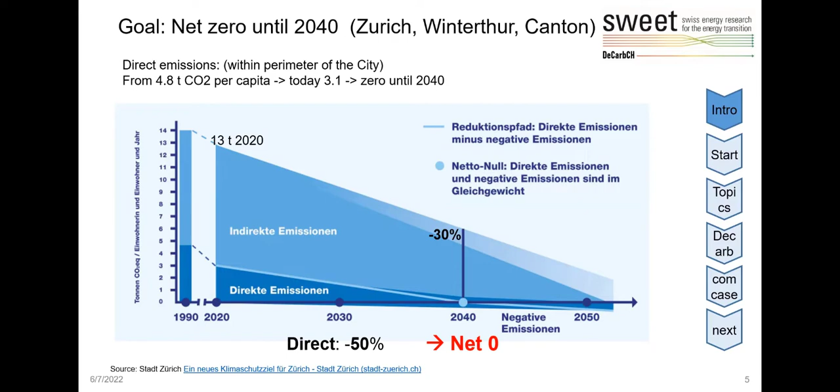Zurich has done a lot already. You see here a graph from 2015. Energy planning of Zurich is a discipline that has long ago started to work on. Zurich has a clear idea of the heating demand for 2050, what demand where, because that's very interesting and important to know where we have to concentrate future supply of the energy. You see here some very dense centers and some regions with low density. We have to find specific solutions for those. And so that's the demand of the heat.

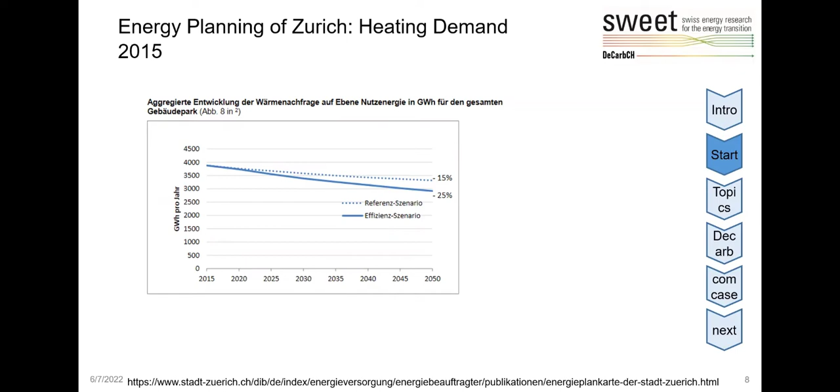There hasn't been a lot yet, but the prognosis here, talking about efficiency gains we have to reduce - that's the scenario, the reference scenario shown as a dotted line, and the full line is the efficiency scenario. So the idea is to reduce demand by 15 to 25% until 2050. Of course that's helping, an important thing to have a chance to come to zero emissions.

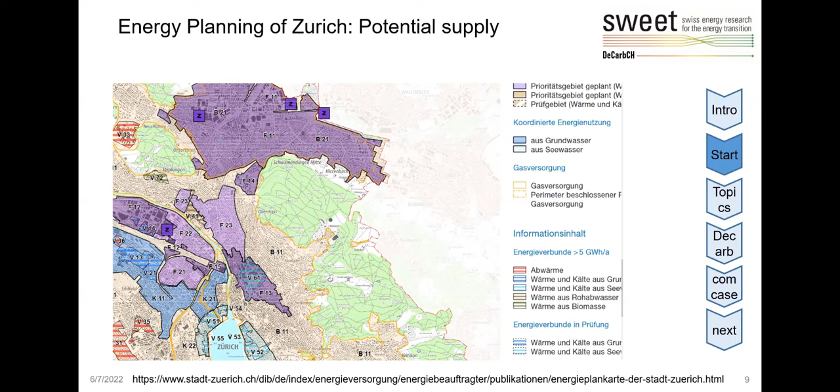The energy planning, what makes it very interesting, is the potential supply of sources for heat. You see here, it's already in a planning stage. We see what areas could be heated by what source, or supplied by what source. So we have water as a heating source, or biomass shown in green lines, or groundwater heating sources, or of course the long distance heating from waste incineration. That's all we have as a starting point in Zurich. The supply zones have already been identified.

What do we have to do? That's from the referendum, what the city already has in mind to take measures to implement to reach the goal of zero emissions.

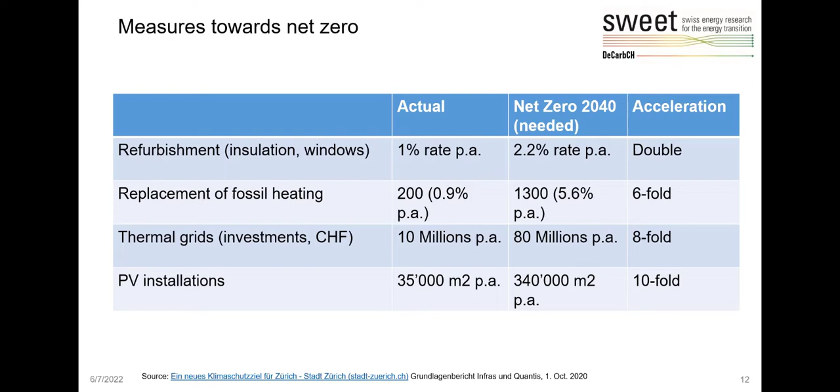So that's the numbers, the challenges that Zurich faces.

The main topics, again from Zurich: the goal until 2040 is that 60% of the heating demand should be covered by thermal grids, an important source of heating, with usage of local sources wherever we can, exploiting energy from wastewater, incineration plants, groundwater, and geothermal heat.

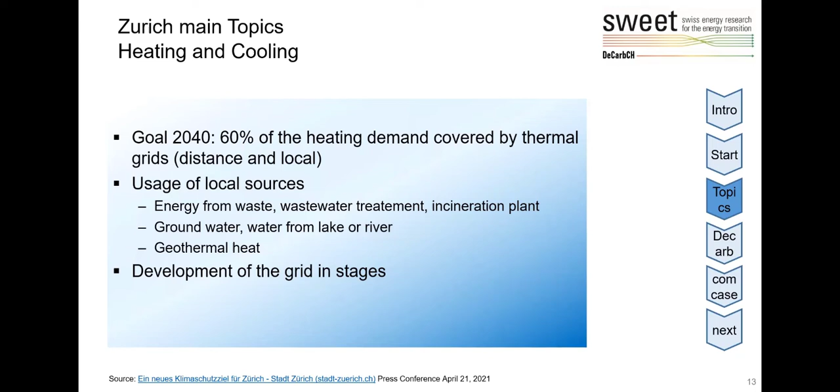Therefore we need development of the grid in stages, as it is planned and confirmed publicly already. In terms of production, we have the renewables, so photovoltaics has to be intensified, and biomass, which of course is a limited source. We're talking about import of wood, for example, or waste biomass.

Energy consulting in terms of energy efficiency, incentives, subsidies, and forced transformation of public buildings. The city wants to be ahead, a role model, and reach net zero by 2035.

So to sum it up, Zurich seems to me like a perfect sandbox for us, the researchers, to implement and see wherever we can, what we can do.

The legend, sorry, it's in German, but it's the long distance heating. It's Erdsonden, meaning geothermal energy, biomass, whatever you can imagine. You find some places probably where we can apply findings whenever they match.

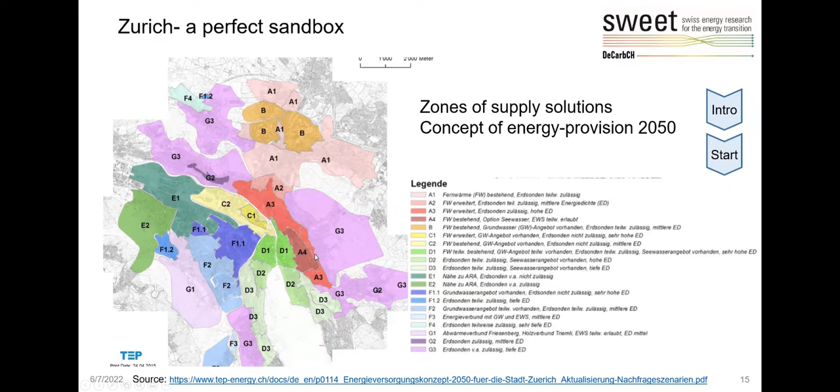So that's the sandbox where we start. And what do we do from this, the perspective of Sweet Decarb?

So that's where we start. That's where we aim to help and work together with the city of Zurich, and what it really matches perfectly is our aim to facilitate, speed up, and de-risk the implementation of renewables, as was said in the beginning of our Sweet Decarb project.

So the task is identification of the challenges - that's what we are actually doing. We want to have the results, and we want to learn from the results for scaling up or for feedback for our researchers.

The thermal grid technologies is a really important issue as well. If we can improve certain things here, that's tasks and outcomes - definition of the top topics.

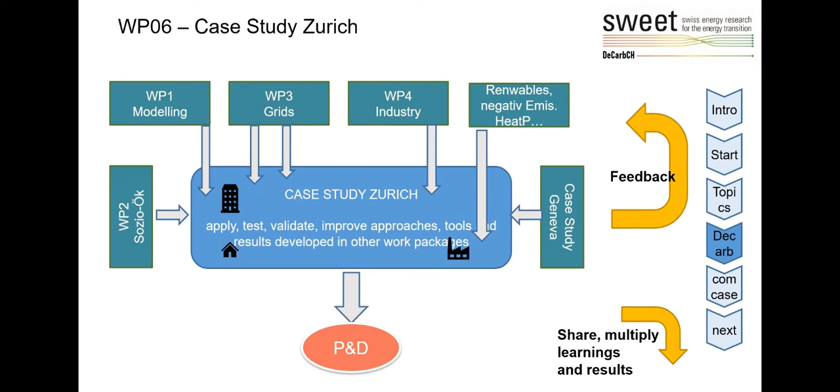What is the framework? What are incentives? What can we do together? Then it's important giving feedback to the researchers when we have an opportunity to apply things, and finally to share and multiply the learnings and the results. That's what we aim for.

Here's some examples of what we could imply or test in the Zurich case study. Work package 2 and 3: the legal framework, socio-economic frameworks, design optimization of the thermal networks. It is decided we have millions to spend, so it's very important to have ideas to improve technology and improve the implementation of this. Work package 3, networks, will of course help us with that.

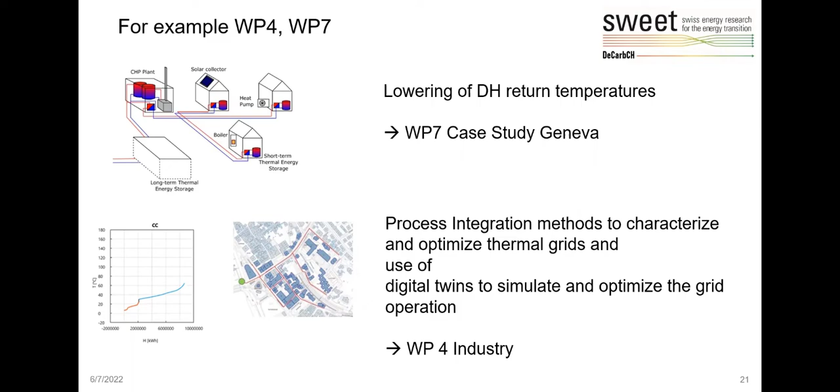Also the other work packages - work package 4 from the industry side, lowering return temperatures, or the work package from Geneva on how to lower return temperatures from the district heating, or process integration. We already have some examples from Zurich from the industry work package that might also have impact or further implementation in Zurich. So the main topics: thermal energy system modeling, technologies, design, legal socioeconomic integration, energy demand profiles.

Renewables, heat transformation, storage - important topics, and negative CO2 emissions.

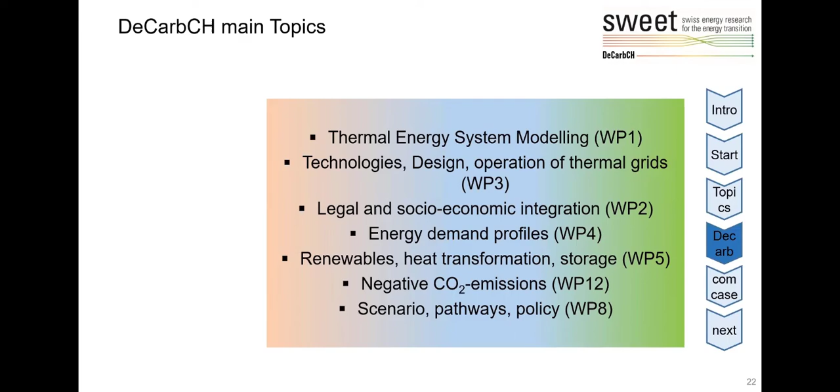We have seen Zurich will need finally certain negative emissions, so that could be important as well. Scenarios, pathways, policy - we've seen it's very important to have ideas on the development of the demand to match it with ideas of the supply.

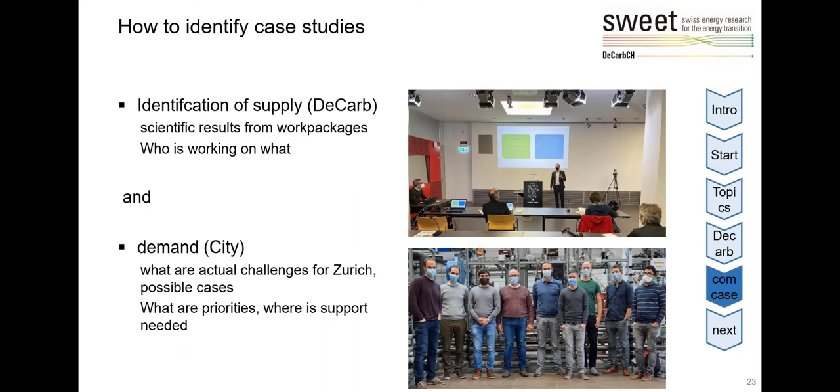So we're now in the stages on the right-hand side. That's just some symbolic pictures. We have our workshops working together, and of course, on the lower right, our researchers with their hands on technologies. So we have to match these two pictures together to identify supply, demand, Zurich, and common needs, common possibilities to work together.

That's the match between Zurich and the research side. That's what we have identified so far. What is of common interest for Zurich and for our researchers?

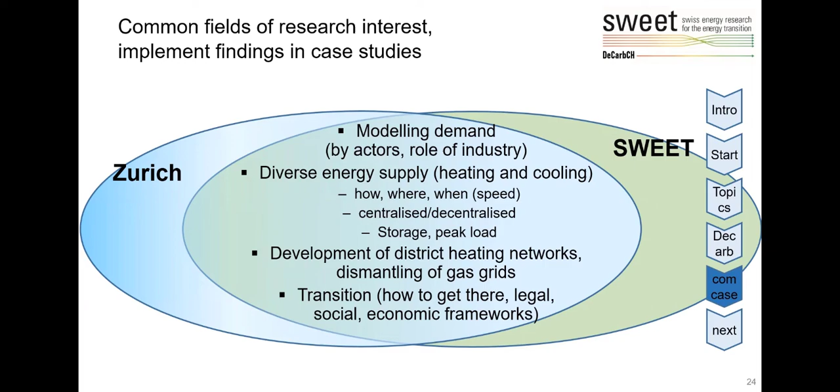That's the modeling of demand, the diverse energy supply of heating and cooling - how, where, when, etc. - centralized storage, peak loads, these questions, development of the district heating networks. We've seen there's a lot of things to discuss, and according to this, also questions of dismantling of the gas grids. The transition - how to get there, what do we need, legal, social frameworks. These are some important questions, of course.

So far we have identified, together with the government of the city administration, the fields of high priority, like modeling of the demand, the energy supply, the potential, the development of the thermal grids, district heating networks. That's of high priority in terms of time and topic.

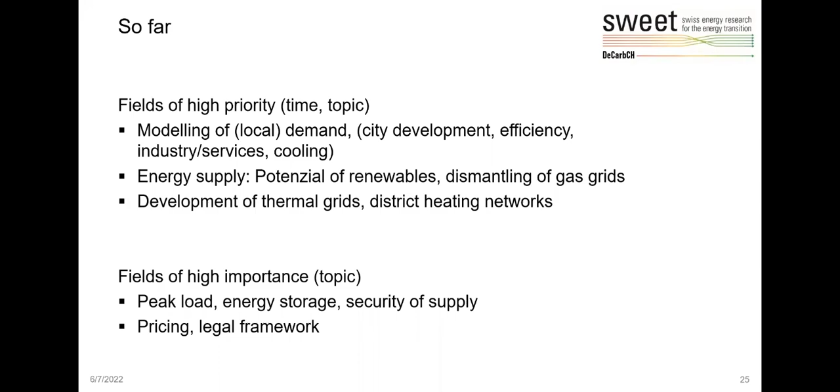Also of high importance seems to be how to deal with peak load, energy storage, efficiency, and of course security of supply - these are important questions as well. Also pricing, legal frameworks - we have to identify this in a political sense as very, very important to have acceptance of our work. Yeah, how do we organize it?

I've explained it already a little bit. We organize workshops, large-scale exchange between all the people from the Zurich side and the research colleagues, setting priorities. Then we organize bilateral meetings on certain topics, because certain people have to match the thematic problems, and therefore we have some decentralized groups, and then we go together. We have coordination meetings to get things together again.

And of course, what is very important, we have to look out already to find pilot and demonstration projects, large scale projects. We have to find them and introduce them to our implementation partners, like the energy services from Zurich, or the gas services, or all the parties that are involved, in order to identify certain pilot and demonstration projects, of course aiming to gain some prizes if we find some really nice topics.

Challenges we have: that's the gap between research and the implementation partners, because the resources are scarce, especially on the side of the city. Time constraints that we have, that the people from the administration have, the responsible project leaders also from the administration.